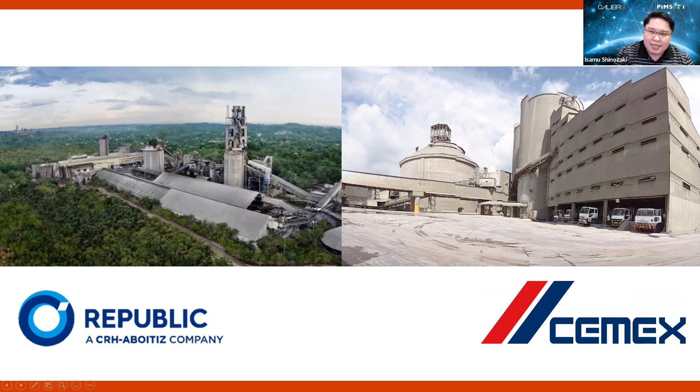So before I talk about what industrial IoT focus is, what is IoT? IoT, of course, is the Internet of Things. It's not something that's particularly new. It used to be called machine-to-machine communication, at least IoT, industrial IoT. We're here at an age right now where everything is smart, from your phone to your other gadgets in the house. What makes a thing smart? It's able to send back information to a system. For example, being able to control your lights at home, being able to know how much power your generator is currently making if you're in the power industry. So a lot of things brought us here. Sensors are cheaper now, the boards themselves are cheaper now. So this is the era we're living in right now, IoT. Next slide.

For industrial IoT, our main focus is giving you more for less. Basically, increasing process efficiency, being able to know how much power each floor of your building is using will help you realize how to cut down costs down the line, and how to increase productivity. We've had customers before that we help transform in a way where users are in charge of their data.

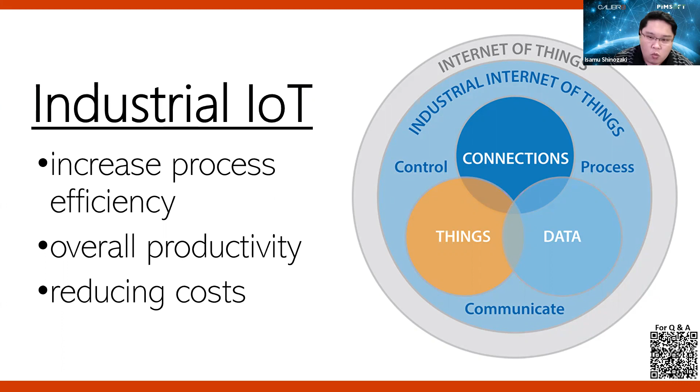Our belief is that every company is a data company. One of the best stories to prove this is one of our pilot deployments back in 2017, where we actually helped a Wagyu farm increase their growth rate of females. So how did we do that?

What we did is we installed pedometers on the cows, either on the necks or the feet, depending on the case. Those pedometers count steps, and they send data back to the Pi system, wherein there's actually a research study that says...

There's a research study that says if you monitor the steps of the cows, once a month you will get a spike in the data that is the trigger for estrus, or when they're in heat. So if you monitor the steps every day, you will see a spike once a month, and that's when they're in heat. When they're in heat, the research study says you have a 16-hour window after you detect that spike. In the last 8 hours of that 16 hours, you have a better chance of birthing a female.

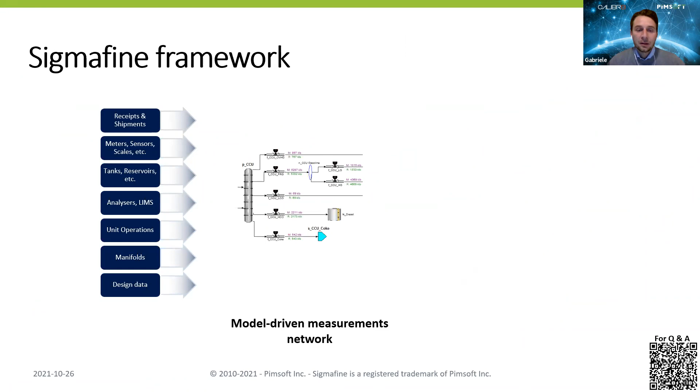Okay, so this is our SigmaFine framework. Our solution is a model-driven solution. As I was mentioning before, we get the data from the field, so it can be receipts and shipments, meters, tanks, information, LIMS, unit operations, and we create a model. A model can be simple or can be even more complex, as you can see here.

Until this one, which as you can see is very complex, and running an analysis daily can be very difficult. So we run our SigmaFine analysis on top of this model.

So when we create a model, we have to define the scope. This model will focus on equipment, on a single unit, maybe on the utility system and network, site-wide, or company-wide. We need to also define the engineering principles that we want to apply in our model.

So there are thermodynamics principles, property estimation, volume to mass conversion, and which analyses are going to be set up in our system - is it a mass, volume, or energy analysis, or a combination of two of these analyses, mass and energy, mass and component. At the end, we have to define the time frame - is it near real time, a batch, hourly, daily, or monthly.

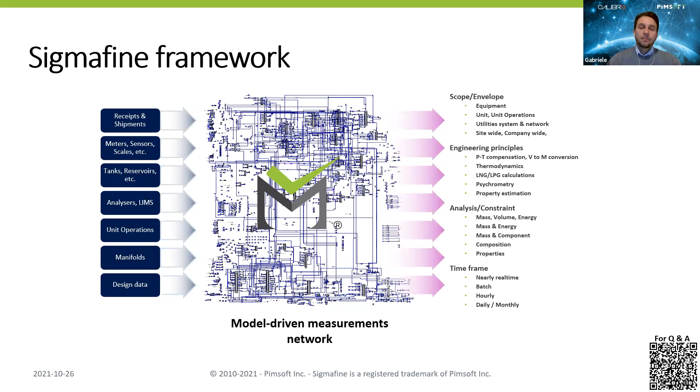Now we prepare 4 case studies: one for the mining sector, one for power generation, one for oil and gas, and the last one for the chemical sector.

So I leave you to the first case study.

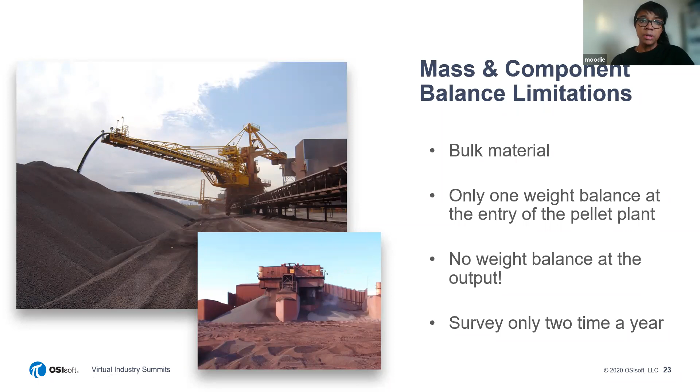And the inventory was done 2 times per year. So if you try to do this on a mass basis, it's probably unsolvable, which is why we had to perform a mass and component balance.

The digital transformation going from Excel spreadsheets to an infrastructure solution involved the SigmaFine balance, which is really connecting your measurements. You can see we have a flow, input, output, a mass flow, as well as an analyzer. This is in the PI, the OSIsoft, let's say, client interface.

On here you can see the components that we were balancing: iron, silica, calcium oxide, magnesium, coke, which was not yet done. This, of course, changes with industry. So if we're in gold, we're using silver, and those components of interest can also be impurities.

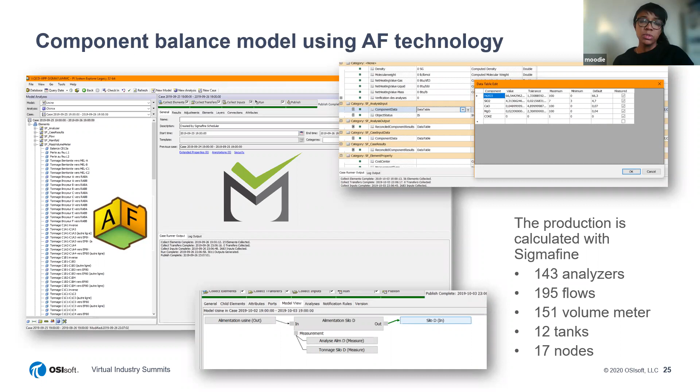SigmaFine, as Gabriele mentioned, is really connecting all your measurements, mass, analyzer, volumes, as well as inventories, and it applies a minimization to get rid of the inconsistencies. So in is equal to out plus changes in inventory.

What did it look like at ArcelorMittal? They drew a flow sheet. In the AF, they have a very small view of one connection, and then they use PI Vision to share the full model to the organization.

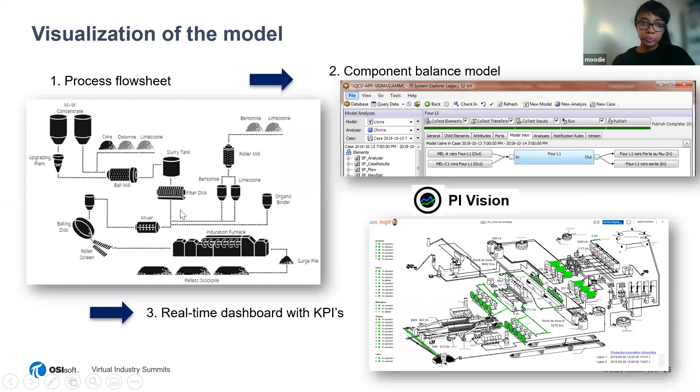As you can see, it looks very similar to the flow. But in terms of making decisions, we also have an SQL backbone on SigmaFine.

With the models of the SigmaFine AF model, mass and component balance, they also have some operational efficiency models at ArcelorMittal. They were able to create this kind of overview of the production, so they could see the total production, the performance on line A and line B, and so forth.

Red indicates that they are below target, and they can drill down and see the history of the performance of this asset. So they really merged the production accounting, considering metals and mining, as well as the asset utilization.

This is done daily, and they can share it with a link. So basically they moved from reacting weekly, with a 3-day delay, to in the morning, the manager has all of this to make decisions for the next day in terms of setting new targets as well as planning.

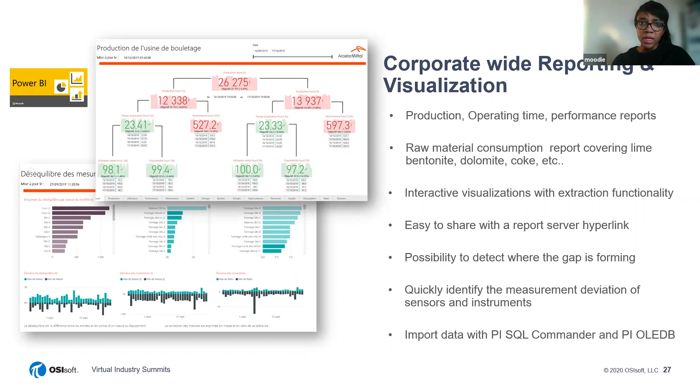Just because I know we have a lot of PI persons in the background, seeing this kind of output, they had AF servers for the SigmaFine and also for the process.

They also use the asset framework, one for the model, one for the OEE, and the event frame you can think of as the mass balance. It's a daily context, it's like an event frame.

They also use the event frame on the assets in terms of running time, etc. And they use notifications for 2 things: one, when the SigmaFine imbalances are high, so instead of searching for errors, they are presented to you, so you know exactly where your data is out of spec. And also on the input data.

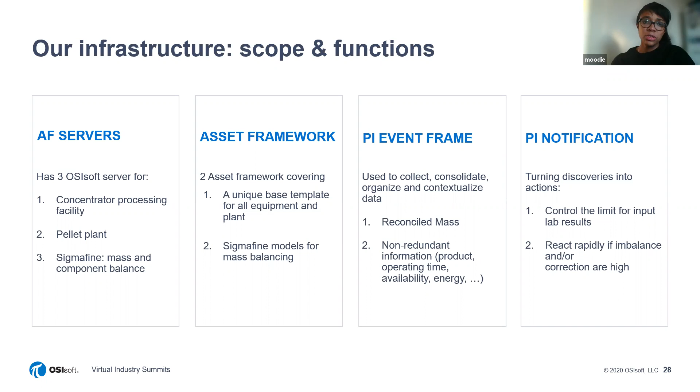So PI notification on the reconciled data, and also PI notification on the input data. Visually, that's what it looked like - you can see there's OSIsoft, there's not just SigmaFine and PI, and SigmaFine being AF friendly and compliant, and Microsoft - they're both our technology partners.

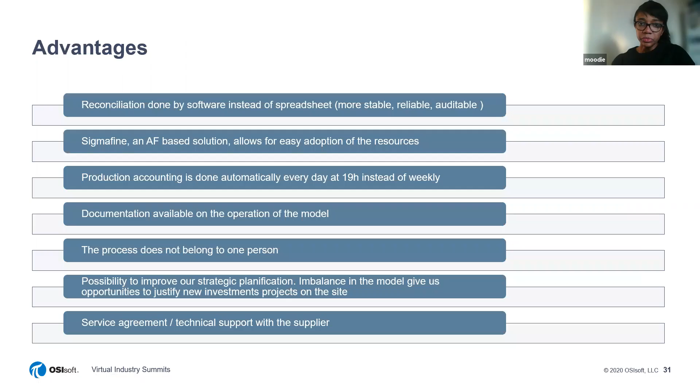We can expose our data quite easily in these visualization tools. So in a nutshell, ArcelorMittal moved from a single spreadsheet towards an AF solution, which now it's a process - it's not one production accountant doing the job. They moved from weekly to daily. The model is auditable, there's an audit trail, it is aligned to the process, and the imbalance gives them opportunity to make new projects.

In the interest of time, I'm going to move to power generation. This case is close to home, as this was my project. And Uniper came to Pimsoft many, many years ago, when they were called E.ON.

And they came to us because from a financial perspective, in the Netherlands, they need to validate their financial data. Here you can see that we have hundreds of financial data and performant internal data that needed to be validated hourly. Now we're in power - a day is too long for a time interval. And before SigmaFine, they had 5 engineers that were doing the balance, checking the data quality, validating the data from a financial perspective, and also taking care of the assets.

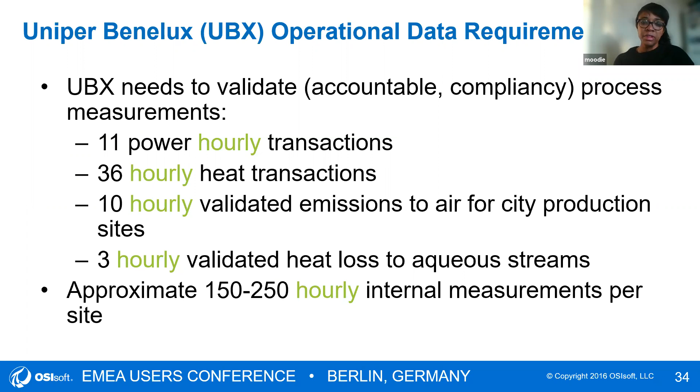To do that, this is what part of the job entailed - lots and lots of Excel. So it's not just lots of columns, but there are lots of sheets, and this is for one site. So you can imagine, and we had 4 sites to do in the Benelux. And maybe another thing that happened in Holland is that they wanted to bill in a 15-minute interval. So there was no way of growing these Excel spreadsheets by a factor of 4. It reached a level where it was not humanly possible to continue to work like this.

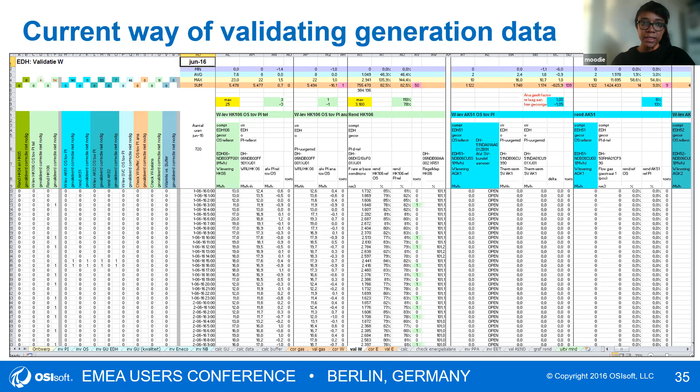So the business challenges for Uniper was to improve the response time to market, meaning apart from looking at spreadsheets and lots of numbers financially, they had to respond and validate the numbers within 9 days. If a mistake was made, too bad, money is lost. And also the decision to make heat, power, and steam depends on the performance of the assets as well as the price.

So the value of the SigmaFine data in Uniper was getting it basically almost near real time - they were getting the balance every hour with a 15 minute, let's say, redistribution. Also, they had another constraint, which is their heat loss to the environment, which also needed to be validated. And if you do it in a bad way, you can be over or under declaring how much heat you're losing, as well as your penalties.

So what was the solution? What did the solution look like? They're a PI customer - they already had the steam tables, they had PI DataLink, etc. Everything on the left was already in place, and what we did is on the right. SigmaFine comes with its own PI AF to build the model.

In this case, it was a linear energy balance hourly. And we also integrated their financial data - so this is their fiscal data. They bought gas at different pressures, and they were selling heat and power in many of the plants, and an industrial plant also sold steam.

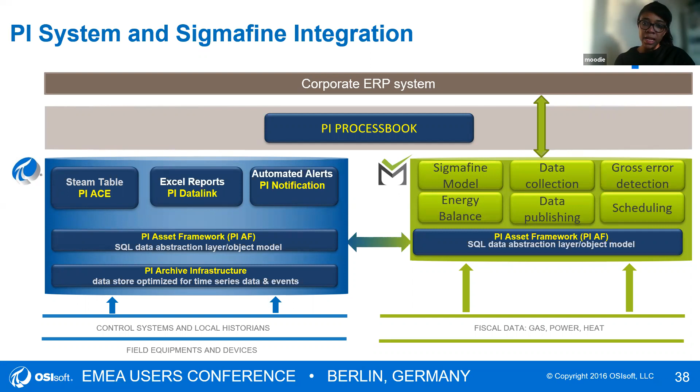So the process of moving from raw data, time series data to financial data had a process. We are collecting the data, we are validating this data in terms of we don't want to use processed data that is frozen, it's above a maximum or a minimum, if it's negative, etc. Not everything was metered, of course, in energy, so we had to convert temperature, pressure, etc. In some cases, we had to use valve positions. So let's just say that the data doesn't have to be from a meter - it can also be an engineering estimate.

Once we collected all of this data, the measurement data, the engineering estimates in terms of using valve positions or losses, etc., from the assets or to the environment, we are able to create a robust model that can then create a data set which has high accuracy that can support their billing and trading. As a result, we gave them a better estimate of their losses. They had the energy balance satisfied throughout the model, from going from gas to steam, electricity, and heat.

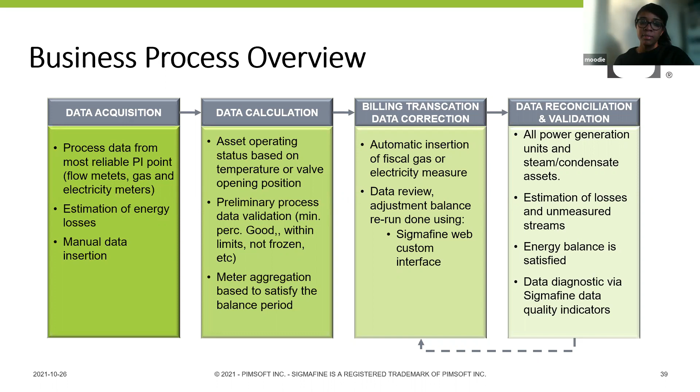And we also give them data quality indicators while they are not using it visually, because we have thousands of data points. Again, we were using PI notification with these statistical indicators to give them a list of the high impacting measurements that were unreliable.

The model on the left, you can see assets which are probably familiar. There's an HRSG, we have a steam turbine on the back, and in the front we had the gas turbine. Here we have some other gas turbines, etc. And we were selling some electricity, etc.

So you guys are, let's say, the experts. I had never worked in power except for this 2-year project, or 1-year project, that I did.

So we moved Uniper from a manual validation to automatic. Everything, there's no SigmaFine user. SigmaFine, we put the integration framework in, it collected the PI data natively, it collected the financial data, it runs the balance, it publishes the data to their financial system. There they can accept or ask for a rerun if they are not happy with the data quality indicators, and then they get an email on which measurements they should pay attention to.

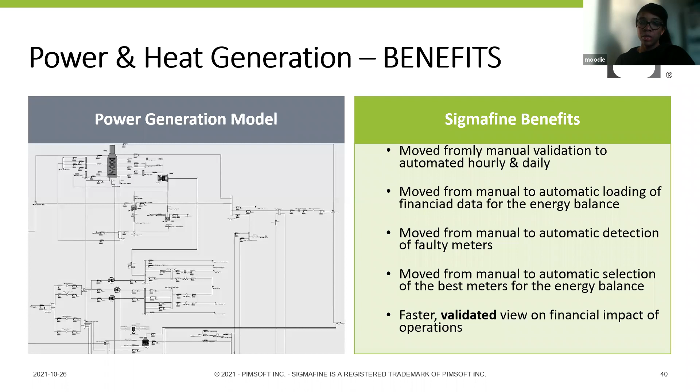So when the project was finished, Sigmafine became really an infrastructure that they don't even use the screen. They use their emails and go to the problem areas. So everything went from manual to automatic, even the detection of faulty meters.

In a nutshell, what did this bring to Uniper? They expected to save 300 to 500,000 K annually, but that's not a number I would quote without context, because this is for 4 sites, and it's related to the megawatts - so 4 sites, a lot of megawatts. But what they said, which I think is of value to who's listening, is that using Sigmafine to get better data and also identify where processes are inefficient, they expect to save 4 to 6% of the heat that they sell to the market, because most of their imbalance uncertainty was on the heat.

So this is what we were able to do for Uniper, really taking them from Excel. Both Uniper and ArcelorMittal were stuck in Excel and spending a lot of time. The resources, very highly skilled resources, were caught up in Excel, and now they are using their skills to improve the performance of the company.

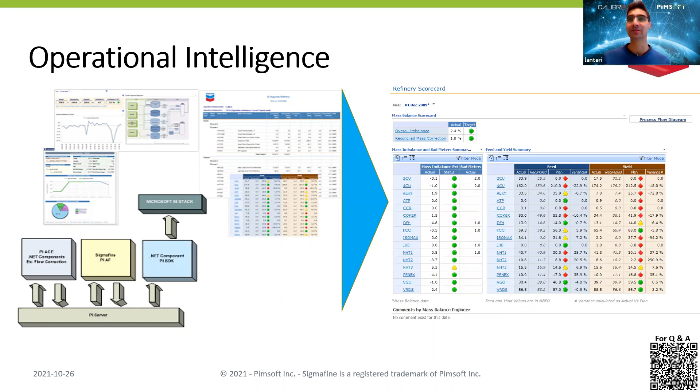Last use case from the refining point of view comes from Lukoil, and here are two examples of web reports, again with data coming out from SigmaFine analysis. Here is a combination of mass balance and composition tracking that are then exposed. As Vidisha mentioned before, we have a SQL way to expose our data, and from there we build these daily reports where we can have an aggregated view of a SigmaFine dataset.

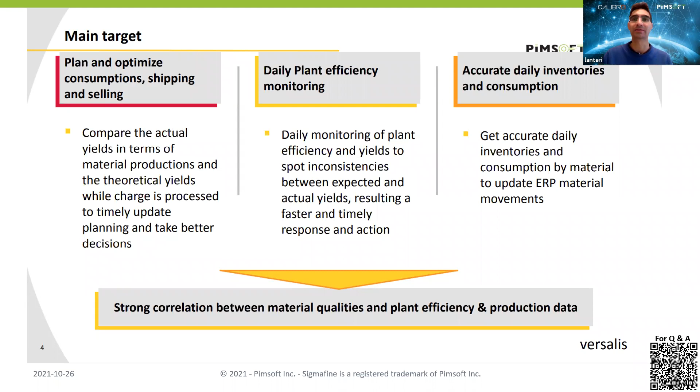Based on the type of materials and the associated properties, we estimated values in places where either there was no measurement or the measurements were available only days after, because the lab had to analyze the sample and then report back. So they had instead an online monitoring tool to estimate the composition of the materials and of the blend that were going to be processed. So you know the composition of the charge of the aromatic plant, and what to expect in terms of production of benzene, toluene, and xylene.

We go to the next one. So in the end, the benefit they achieved was double. On one side, better operation, because they could estimate better the unit yield in near real time.

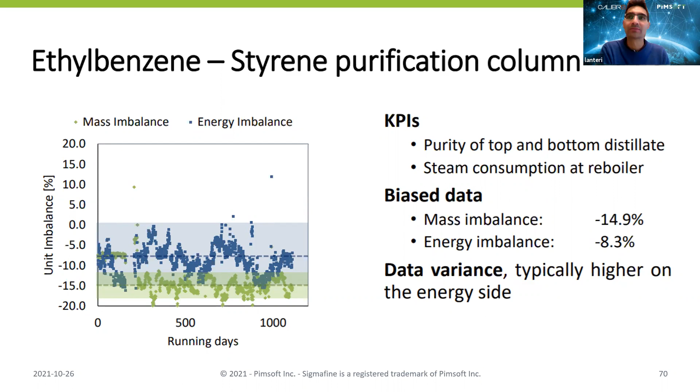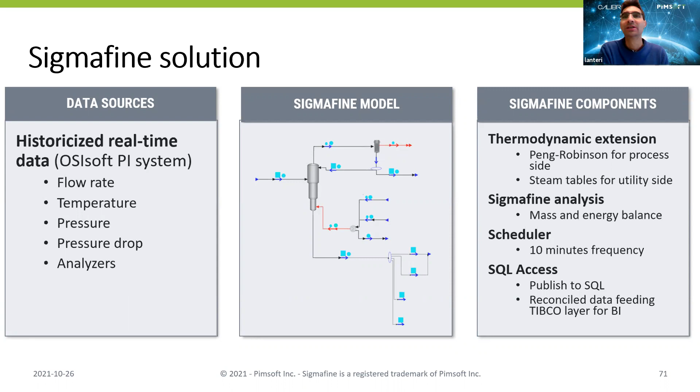So we discovered an operational gap that was quantified at the time at about 2,000 euros per day of missed revenues. Based on this information, they changed the way they were handling the column, reducing a bit the heat load, while at the same time still keeping the product in specification.